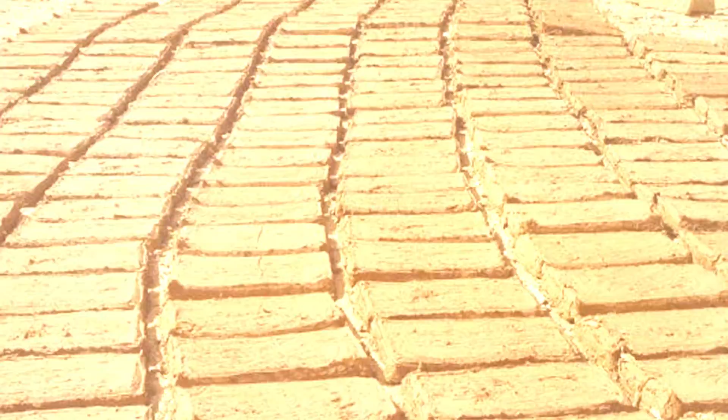Around 4400 before Christ, the first fired bricks were found in a walled Daxi culture settlement called Chengtoushan. However, it wasn't until 3500 before Christ that fired bricks gained a lot of interest. This was, no doubt, the biggest step into the future. From then on, bricks could be made without the heat from the sun. They quickly became popular in places that don't get as hot.

These bricks were made from red clay, baked at over 600 degrees Celsius on all sides, and used as home flooring. By the Qujialing period, 3300 before Christ, roads and building foundations at Chengtoushan were made of fired bricks. Thousands of years later, scientists are looking at the possibility of replacing lithium batteries with fire bricks.

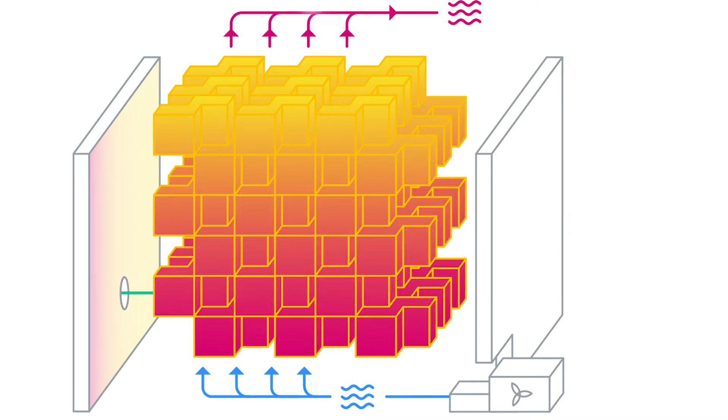Lithium-ion batteries are great at storing energy, but this ability slowly disappears as they are charged and drained repeatedly. Keeping energy stored is quickly becoming one of the biggest problems of the 21st century. The cheapest sources of clean energy are hard to predict, so we have to store the energy while it's being made so we can use it when we need it. In this video, we see how 3000-degree bricks will end battery storage soon.

Lithium-ion batteries store energy in places as small as people's homes and as big as huge ones that are directly connected to the grid. But storing energy this way on a larger and larger scale is expensive and can be bad for the environment. So, what effort are scientists pulling to solve this problem? Researchers at MIT, Massachusetts Institute of Technology, are looking at the old technology of fire bricks again to see if it can help the world switch from fossil fuels to renewable energy.

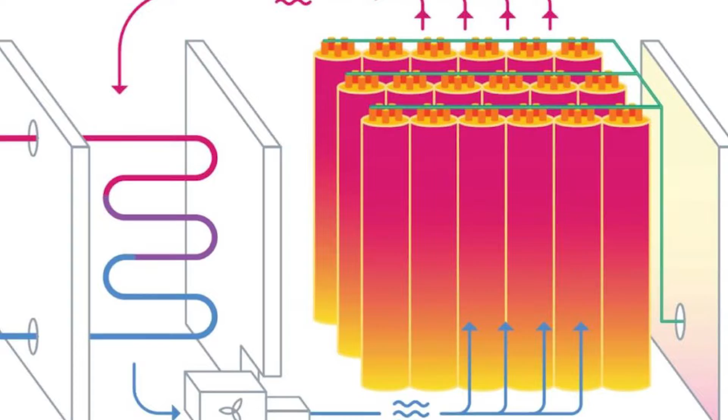The researchers devised a way to turn extra electricity made when the wind blows or the sun shines into heat that could be stored in fire bricks for later use. Their firebrick resistance heated energy storage, or FIRES system, costs 1/10 to 1/40th the price of pumped hydroelectric systems or batteries. How does the FIRES system work?

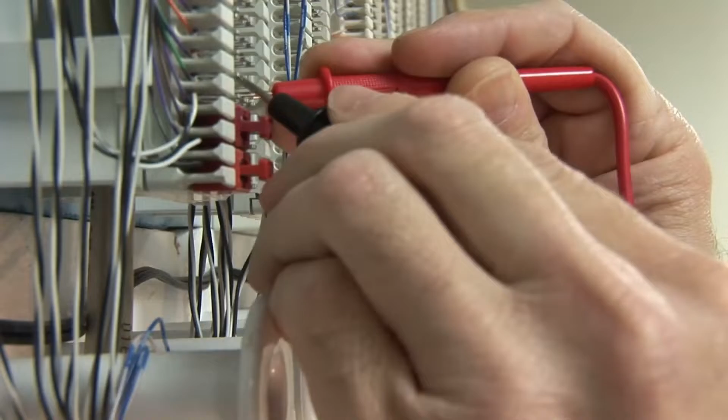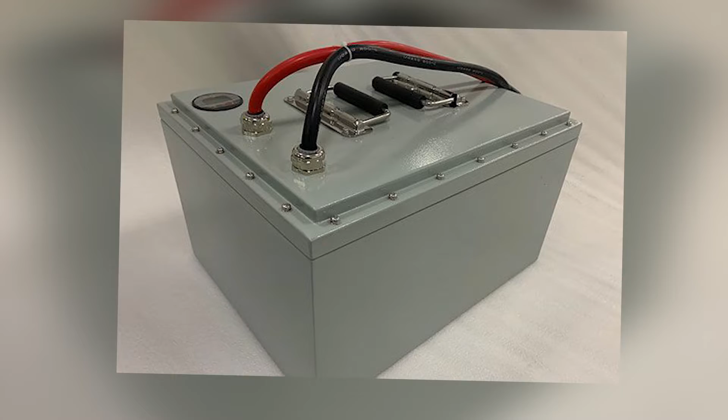Excess electricity is converted to heat by electric resistance heaters, which is then stored in a vast mass of firebricks. According to their findings, they can keep the heat for extended periods when the firebricks are contained within an insulated casing. The heat could be used in industrial operations or later converted back to power.

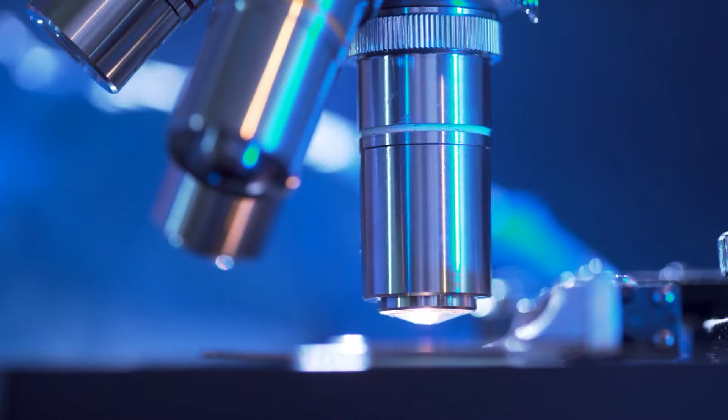Regis Matzie, retired Westinghouse Electric Chief Technical Officer, was not involved in the research. However, he told MIT that how electricity prices are determined in the US results in a skewed electricity market with low or even negative prices when renewable energies supply a significant portion of the grid. He believes FIRES could provide a novel answer. Nonetheless, he insists that a demonstration would be required to determine whether the technology is actually cost-effective.

The Electricity Journal published the MIT study online at the end of August. The next phase will be to build full-scale prototypes in the real world, which lead author Charles Forsberg anticipates will happen in 2020. He stated that they are seeking the proper customers, citing an ethanol factory as an example, because they use a lot of heat and are located near a huge wind farm.

Rondo Energy is yet another outlet trying to avoid the problem. So, how does Rondo Energy avoid this issue? And what makes their technology so unique that Bill Gates' clean energy funds are interested in it? Some systems use mechanical or gravitational energy, but Rondo uses thermal energy, which is very handy if you want to heat something. Many other thermal storage methods exist, but at the end of this video, you'll understand why this one is unique.

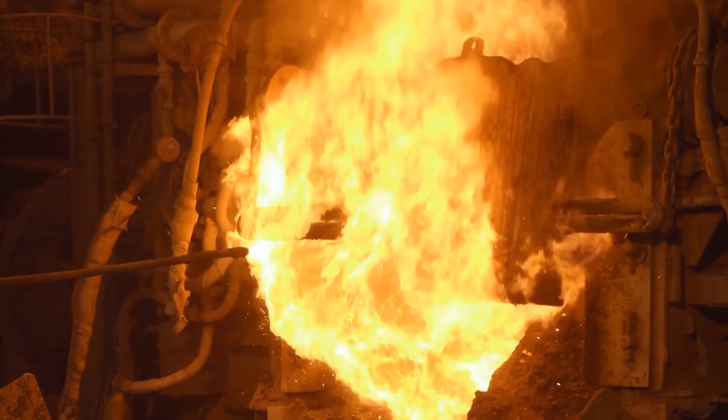The first major problem with most thermal storage devices is that they are excessively cold. This is a concern for many thermal storage applications. This is because they retain less energy and can't supply heat at the needed temperatures. Interestingly, steam near or more than 1000 degrees Celsius is frequently required for industrial heat while working with steel, cement, fertilizers, and ethylene. Some of Rondo Energy's investors are cement makers. Apparently, their approach will contribute a large early step in reducing cost at a reasonable level.

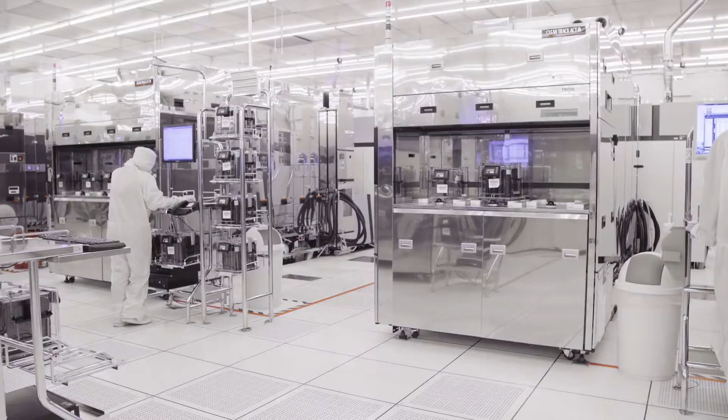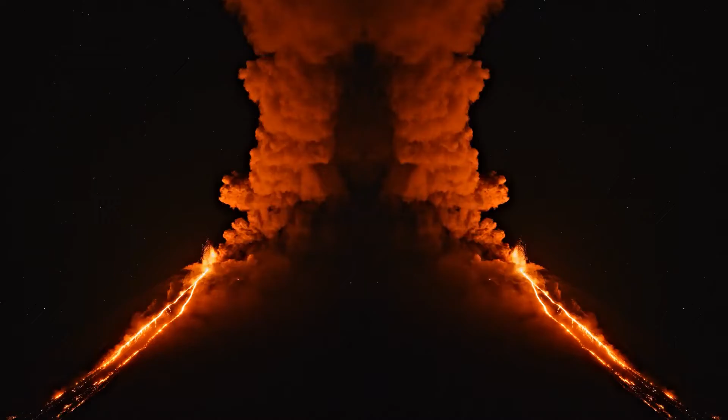Although we rarely think of industrial heat in our daily lives, it accounts for a significant portion of worldwide energy usage. In fact, industrial applications account for more than 30% of overall greenhouse gas emissions, with heating accounting for more than 70% of those emissions. No doubt, this is a huge challenge to industrial heating processes.

And, while batteries could be used to store electricity that is subsequently utilized to heat up steam to the requisite temperatures, they are nearly always prohibitively expensive. However, the Rondo heat battery combines inexpensive renewable energy with cheap storage, making this green option less expensive than natural gas. This is a win-win situation in many worldwide marketplaces, especially given that this is a difficult to decarbonize industry.

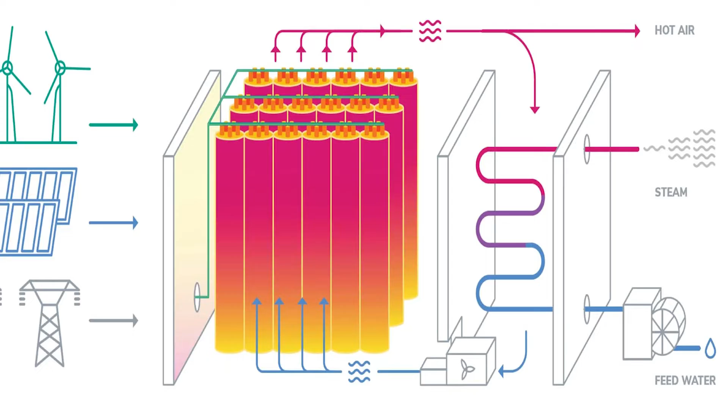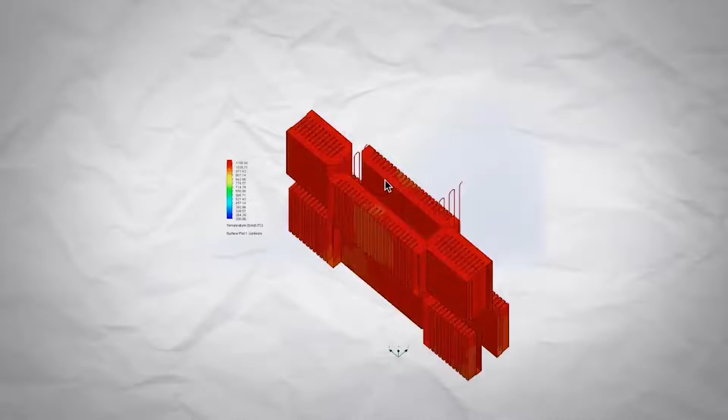We now understand why the Rondo heat battery is so useful. Let's see how the technology works. Although this system is generally straightforward to grasp, some fascinating engineering is going on behind the scenes. The intermittent energy from the grid enters the system and drives electrical heaters, which heat the bricks in an echo heating chamber. After the bricks have been heated and the system has been charged, air can be blown over those bricks to be heated up before being used to heat steam in a heat exchanger for continuous usage in industrial applications.

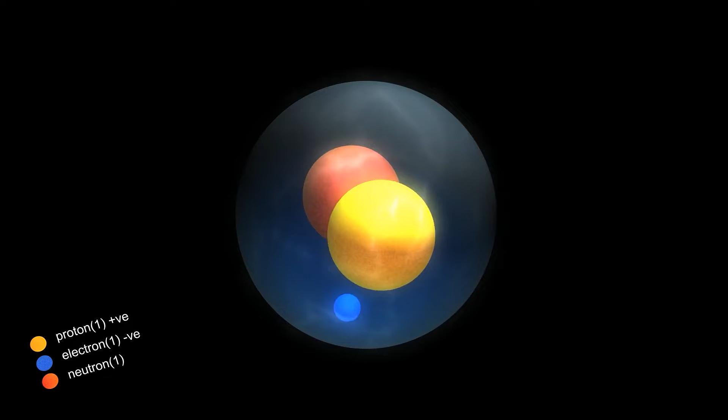The best part is that these are all tried and true technologies from other industries that Rondo is putting to use in a fresh way. Their core idea is based on the understanding of basic physics, followed by the system design and its applications. The main innovation is the previously described echo heating chamber. That was the innovation that enabled the development of a heat battery that is extremely low in cost, extremely efficient, and capable of delivering almost 95% of all industrial heat used globally.

The bricks and heater are located in the echo chamber, where they radiate heat to one another and bounce around like an echo. Actually, this is what allows the system to function. Most other heat battery technologies use a fluid, such as water or air, to heat the storage mass, which could be sand or rocks. However, because heat is sluggish to transmit through the storage medium, this process necessitates turbo equipment and results in hot patches within the battery. Both of these constrain the operating temperature and the pace at which the system can be charged and discharged. One thing that has been observed in power grids all across the world is that the faster you can charge, the more advantage you can bring to the grid.

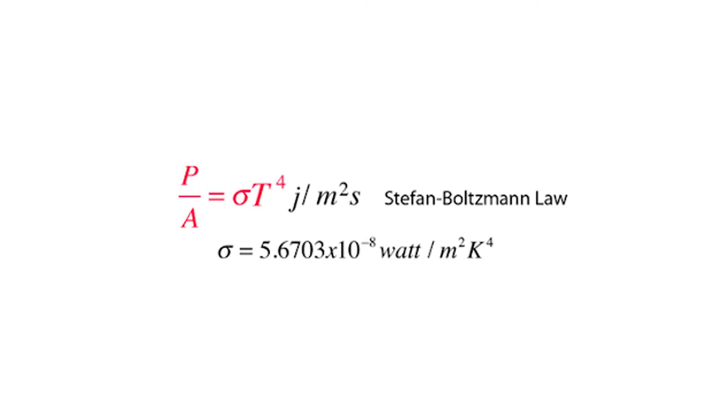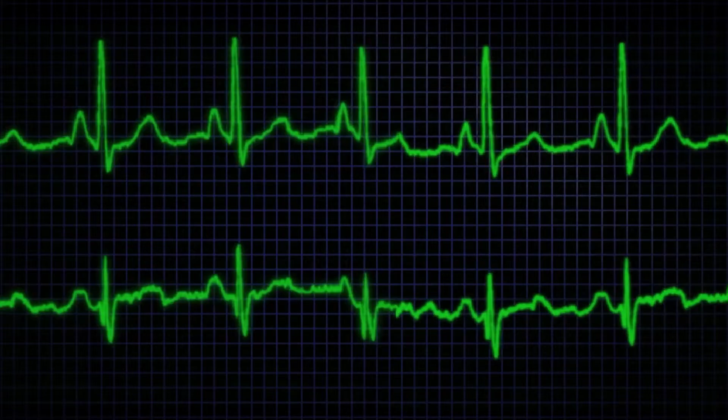The radiation equation explains why the radiation echo chamber works. The first three terms are the Stefan-Boltzmann constant, material emissivity, and surface area. What is essential is that the temperature variables are raised to the fourth power. This implies that if one brick is even slightly colder than another, a large quantity of heat will be transferred to it by radiation, allowing for uniform heating and no hot spots. Because of the extraordinarily high temperatures enabled by this technology, the system can have energy densities as high as lithium-ion batteries at roughly 260 watt-hours per kilogram.

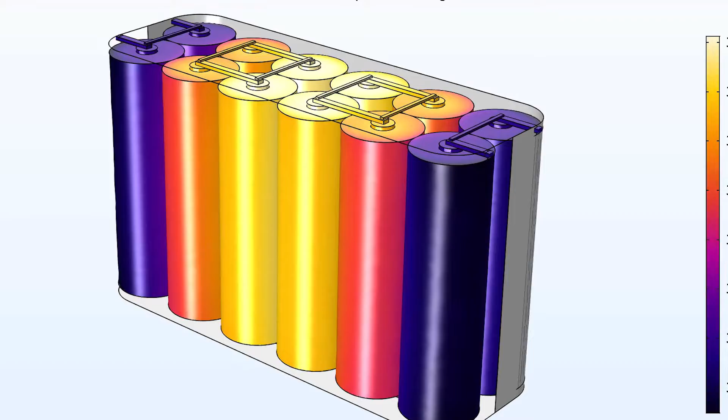However, because the energy stored is related to the change in temperature, we can only attain this total energy density by discharging the battery much below the 1000 degrees Celsius output that we require. As a result, Rondo can employ a two-stack technique, in which one heat battery can be fully discharged to temperatures well below 1000 degrees, and used to preheat the air before entering a second stack and heating to the needed temperature for the steam. Rondo employs dynamic insulation.

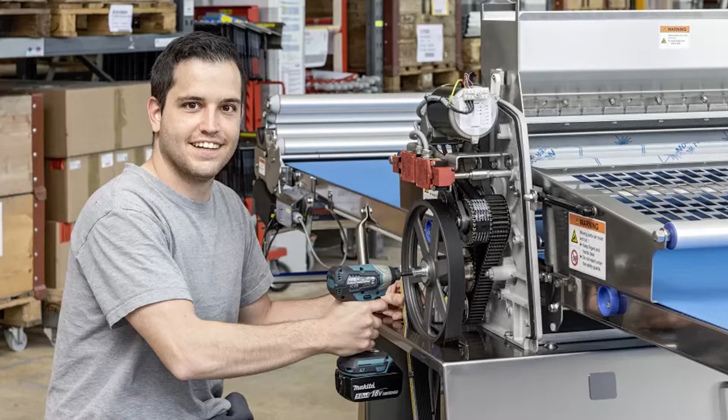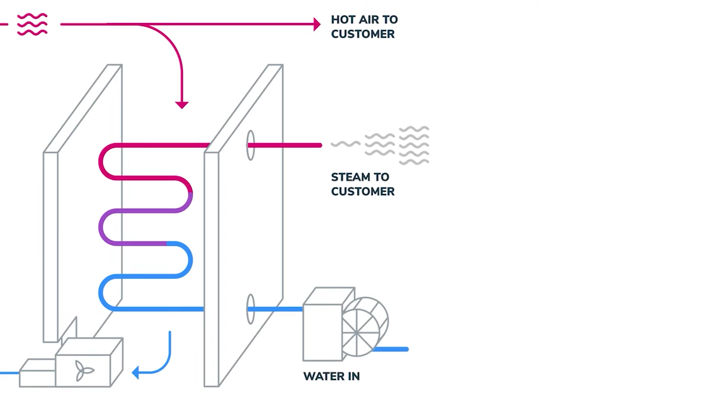The heated bricks are surrounded by a double wall with an air gap between them. This is comparable to double glazing, which employs argon gas between the two panes since argon conducts heat poorly. The fact that the air in the air gap circulates around the entire system before being routed via the heat battery and over the hot bricks makes Rondo's installation dynamic. This means that the last layer of insulation will only have to contend with temperatures around 150 degrees rather than around 1,500 degrees within the actual chamber.

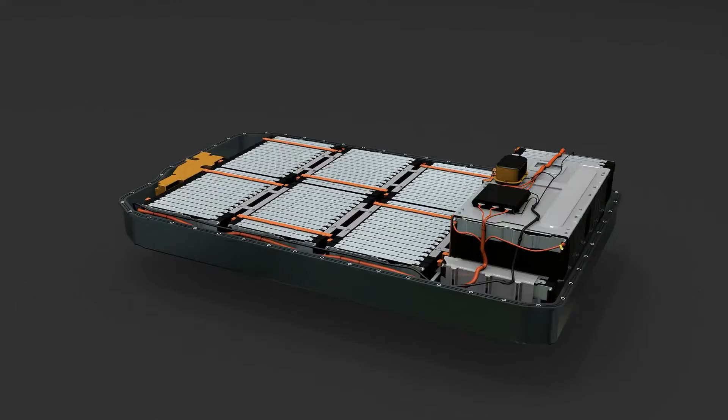Despite the fact that industrial heat is certainly a large enough industry to tackle on its own, Rondo's heat battery might be employed in other scenarios, such as district heating, in which thermal energy is saved and provided to residences via a heating network. That's all on how 3,000-degree bricks will end battery storage. What do you think? Is this a sustainable invention? Do you expect scientists to do more and curtail any unforeseen loopholes that might appear in the future? Are you excited about the development?